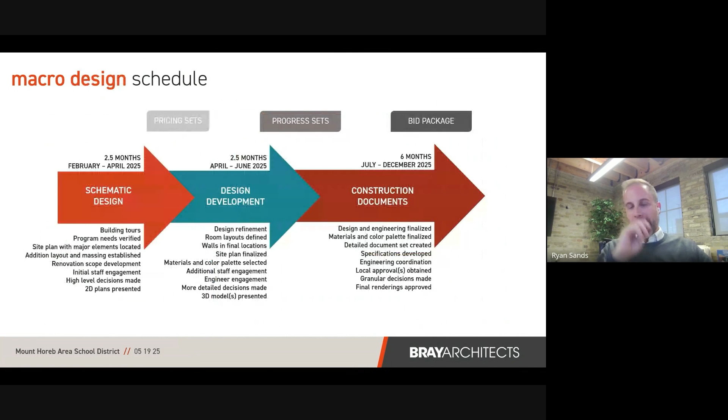We wrapped up the schematic design phase at the end of April, and we met with the core planning team a couple weeks ago to review both the schematic design progress set, doing a page turn of where we sit today from a documentation standpoint, as well as review the budget, which I'll hit on again in a minute. So we've entered the design development phase.

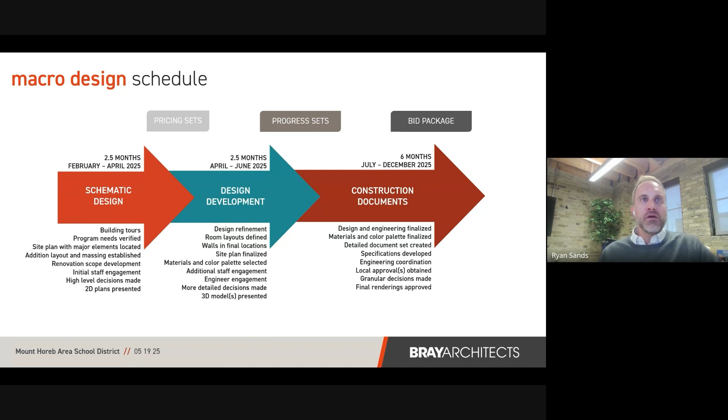We're starting to layer in more detail, continue to engage with users, and start to engage more heavily with our engineering consultants. We've also continued staff engagement. We've met with the primary center subcommittee, which includes the primary center and ELC staff member representatives from the different groups, departments, and grade levels. They've continued to provide important feedback.

We've now had multiple user group meetings with kindergarten, special ed, kitchen food service, math intervention, reading specialists, and music. They've provided more specific feedback on their individual spaces or rooms.

And we are scheduling additional user groups moving forward. We've got one tomorrow afternoon and a couple coming up next week as well.

Last week Monday, we had an all-staff presentation for the primary center and ELC staff, and offered an opportunity for anyone from the district staff who was interested to learn more of an overall update on the design progress so far. We went through the plans, the site plan, and the preliminary conceptual exterior view that you saw at the last board update.

So it's been great to get everybody's input on the process and the design as we've held those staff engagement opportunities.

From a budget standpoint, we have a number of checkpoints built into the design schedule. So at the end of schematic design, at the end of design development, and at the 50% construction documents benchmark.

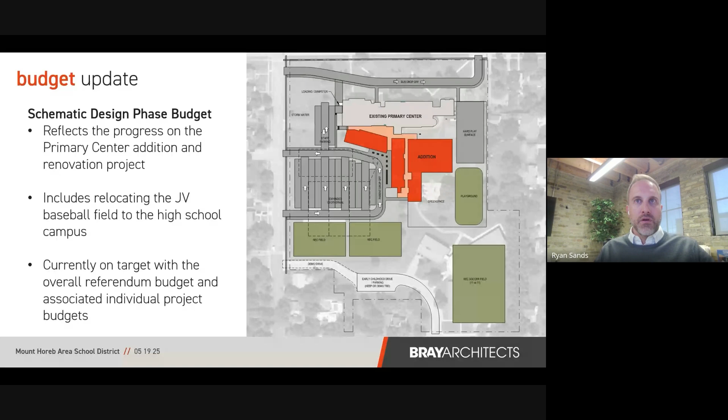As far as design update, not a whole lot has changed from a macro perspective to the floor plans relative to what you saw at the last board update in April.

We've been adding more layers of detail as we've met with user groups. So in kindergarten, for instance, we've gotten feedback on specifics related to the casework, the storage, how the room is configured from a technology, whiteboard, tackboard standpoint, as well as similar feedback for many of the other spaces. I have all the floor plans for reference in case there are any questions.

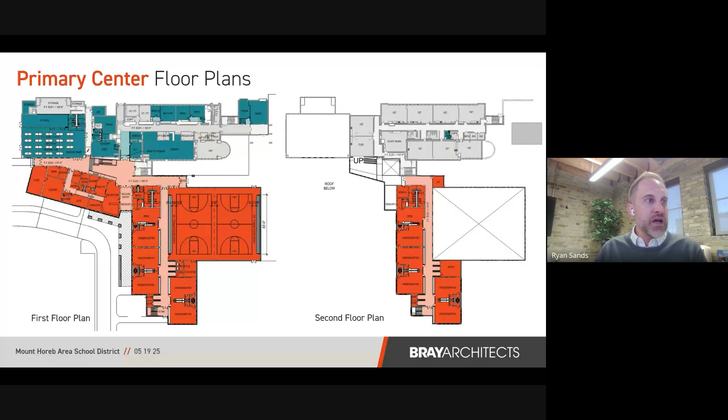One area that we have dialogued a fair amount about is the conversion of the existing gym into the cafeteria and kitchen.

And so we've had a couple of meetings, including your food service director, Michelle Dank, and others to get input, including our consultant. And we landed on probably needing a bit more space than we were showing in our original concept.

And so we explored a number of options for how we configure the toilet rooms as part of the cafeteria conversion and where those were located, and landed on this as an updated plan.

This doesn't have any detail yet for the kitchen and servery itself, but it was more of a test fit to get the amount of square footage we think we'll need to meet the goals of a modest production kitchen at the elementary, while still meeting our seating count for the cafeteria and providing, in this case, 4 individual toilet rooms. It's similar to what you currently have at the primary center, where you have 2 individual toilet rooms in the lower level cafeteria. Here we'll be providing 4, along with some hand washing opportunities off the corridor, creating a nice flow down this corridor through the servery, back out into the cafeteria, with the opportunity to stop and wash hands on the way to lunch.

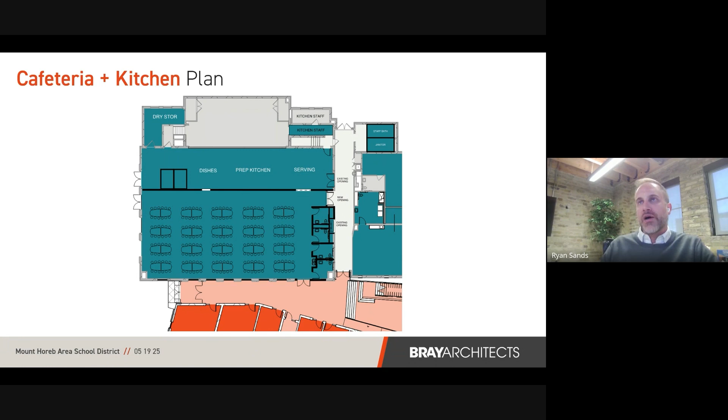We will be adding windows along the west, bringing in daylight as well as borrowed light, in alignment with where there were formerly window openings. So it's a unique opportunity to take advantage of and restore some of those previous openings in the renovation.

I apologize, one of my colleagues just left the office and forgot his keys. Would you give me 30 seconds to go let him in? I'll be right back. Sorry. You got it, thank you. That's hilarious, lucky he's still there. Yeah, no kidding.

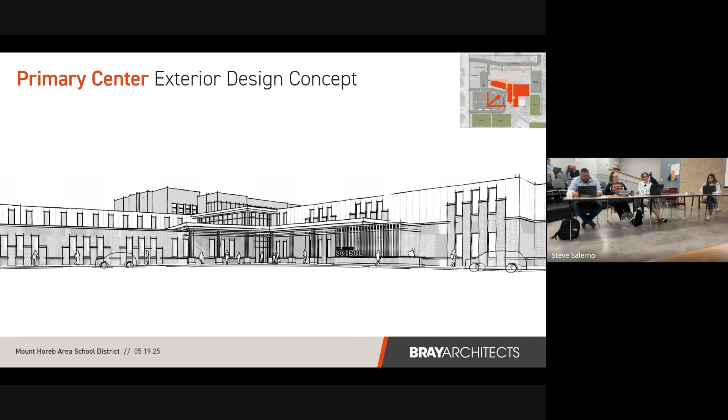All right, hopefully that was less than 30 seconds. Sorry about that. So I've got a handful of 3D views.

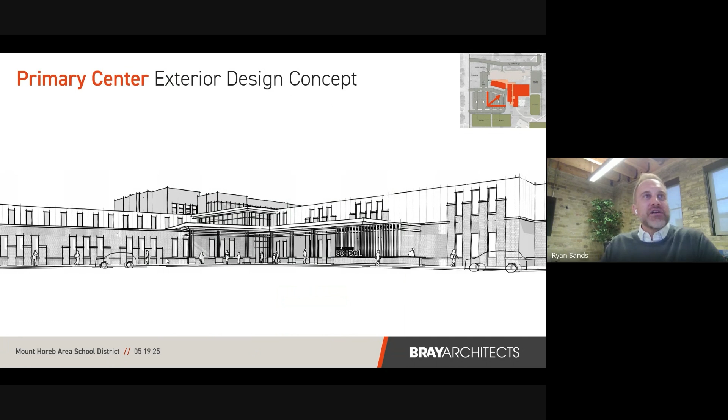You can see some of the elements we talked about last time, such as creating a nice canopy for waiting and entering the building. We've got the suggestion of some planters and built-in bench opportunities, both for students waiting for rides or parents waiting to pick up their children, as well as through the lens of safety and security. You can see how the massing is starting to formulate, with a nice glassy 2-story entry leading to the 2-story commons area, connecting existing to new.

These windows up here will bring daylight into more of the center of the building, so we'll get a lot of daylight deep into the space. You can see the rhythm of what we're suggesting will likely be brick masonry on the lower level, with some type of metal panel and punched window openings relating to the design language of the existing building.

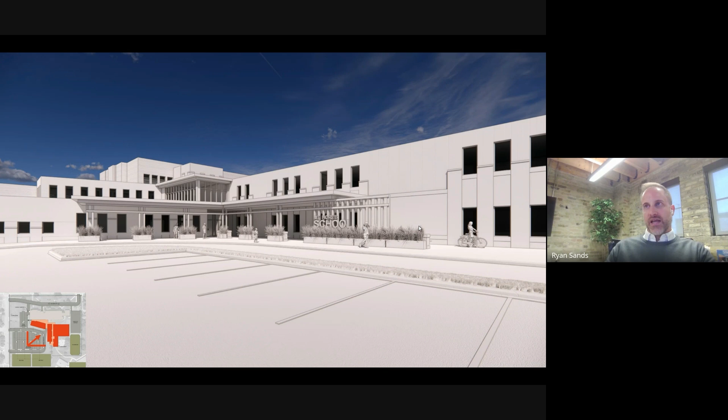The next view, we're going to spin around to the end here, looking down the entryway under the canopy. This is just a view at a slightly different angle of the entry from the pickup drop-off drive.

Now we're looking down underneath that canopy, so you can see the benches sheltered on the backside of these seat walls, some potential for plantings out front, and then that kind of trellis and canopy leading to our main entry vestibule.

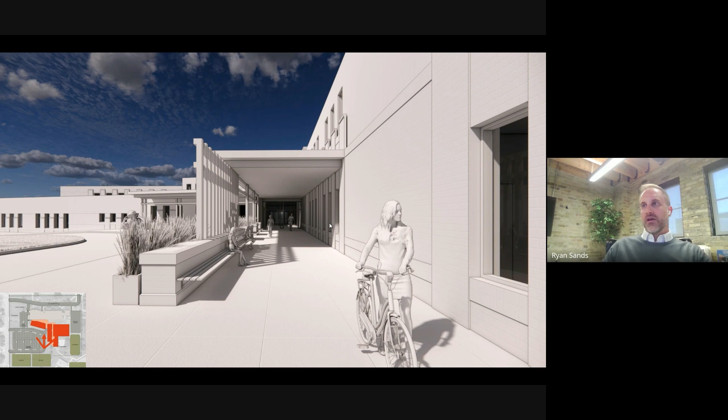Just a slightly zoomed in view. So here you can see the vestibule, a lot of visibility into the office. The office staff should have good views of people both approaching the building and as they enter the vestibule.

And then there's potential for seats here, somewhat similar to the entry and canopy at the high school. Like I said, opportunities for parents to wait for kids or kids to wait for rides in a protected environment. Now we're going to jump to the end of the addition.

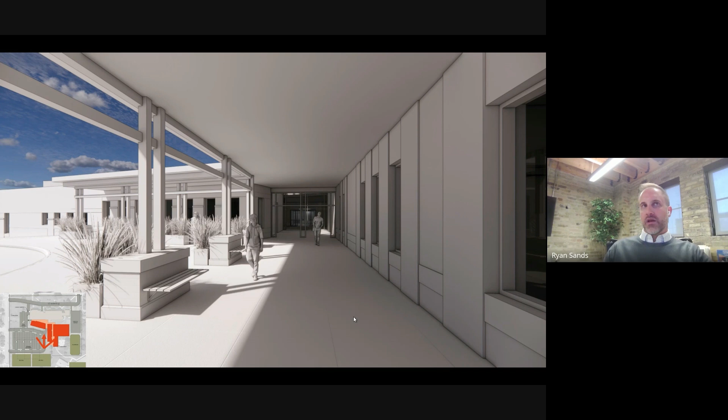So here you can see where we were a moment ago. Now we're basically on the end of the kindergarten wing. We're still working through balancing window locations into classrooms where we want to maximize opportunities for daylight, with teachers wanting plenty of wall space for pinning up work or other resources for students.

We'll have a set of doors here at the end of that wing for ease of access, both from the playground and for exiting for pickup at the end of the day.

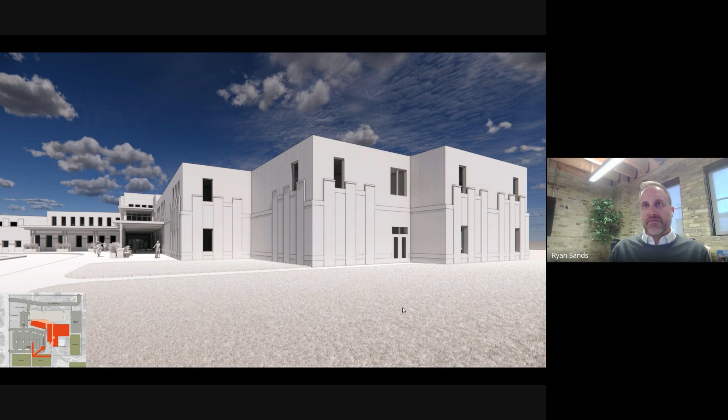The site is really just kind of a placeholder right now. We'll have more sidewalks, and a fence coming off of here to enclose the playground. So a lot of details to add as we progress the site design.

Now we've spun all the way around to the existing entry. So that's right here. You can see your current vestibule and canopy, and then the curved piece of the existing art room. This gives the perspective of how the gym will sit relative to the existing building.

And then we've got our east-facing entry point or access, which will come out to the playground, which will kind of be in this zone here.

We're still working through exactly what the windows into the gym look like, but we'll definitely have daylight, and we're looking to maximize what will be the north side of the gym. So that will be nice, even north-facing light. It'll be diffused, and we won't have to worry as much about direct sunlight or glare within the gym.

You can get a sense for how far away we are from the building, and I'll zoom into this area in just a second. And then you can see on the second floor, this is one of our large group instruction rooms just off of the connector that leads down to the kindergarten wing.

So now we've zoomed in on that entry or exit, however you want to look at it, the access from the building to the playground. Here you can see the existing windows into the library, some of those existing second floor windows.

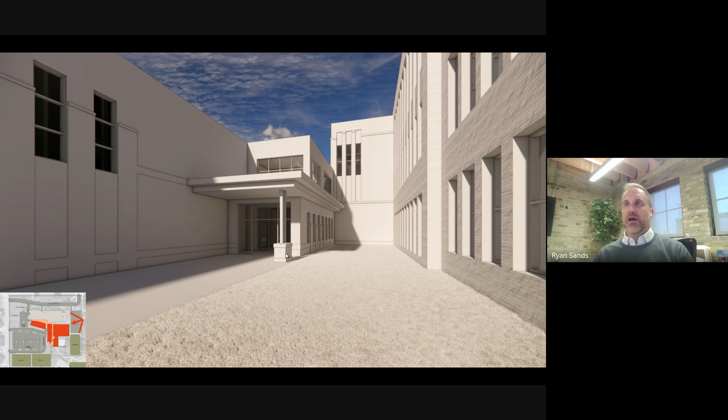So basically this corner here is our joint between the addition on the left and the existing building on the right. Similarly, you can see how we're trying to tie in some of our punched window opening language with the existing building, as well as some of the architectural elements that relate to the current entry, vestibule, and canopy.

So we want the building, when we're all done, to feel very tied together and have the addition really complement and tie into both the existing historic building as well as the addition that was added previously.

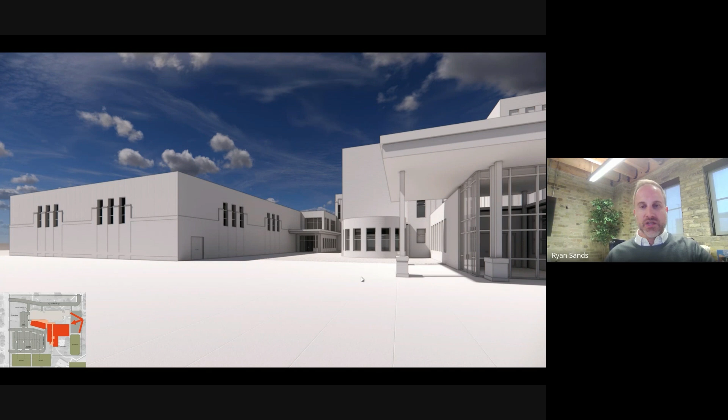As far as next steps, we'll be taking the 3D images from white mode and starting to get material samples and apply actual brick matches and explore metal panel color options. So take those to the next level.

We've got in a few weeks our preliminary interior design and finish presentation with the core planning team. So starting to look at what types of interior finishes, flooring, paint, ceilings, wall panels we'll be planning for the addition and renovations. And then in a subsequent meeting, we'll get down to the actual patterns, colors, and specific products that we're planning or proposing.

We're continuing, like I mentioned, to engage with engineers and consultants to get more detailed information. We've got a couple of conversations planned for our next CPT meeting related to the geothermal HVAC system and getting into some details on that, as well as looking at the JV baseball field relocation and exactly what we need to include to make that successful.

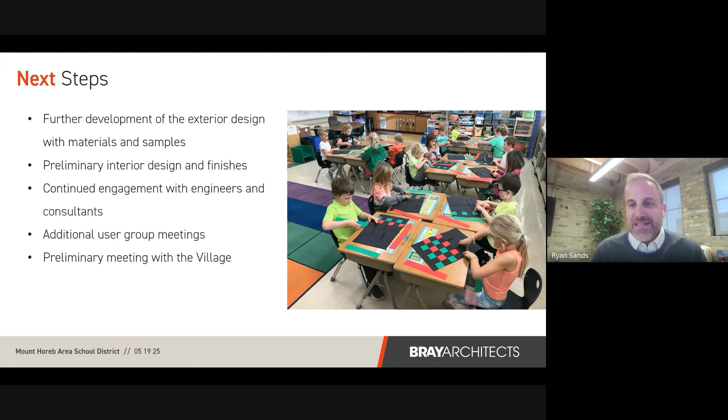I had mentioned before, we've got additional user group meetings scheduled, and then we're working on scheduling a meeting with the village likely in early to mid-June, once we have a civil engineer drawn site plan to review with them.